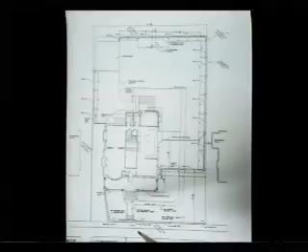The proposed retaining walls to be constructed at the back edge of the public sidewalk extend from the north property line to the main entry street, with steps where it turns at right angles. If I could see the site plan. Randy? Maybe I could show you easily. Can you just enlarge this little section here?

The retaining wall starts at the north property line, comes across to this area right here at 2 feet of height, and then at 2 foot 8 down to the steps. And then the little wing wall steps back to 2 foot 8 and comes back to the porch of the structure. These steps adjacent to the public walk, as well as to the entry walk and the wall of the side, are proposed to be constructed of dimensional pavers, up to the main house entry steps and all around to the side.

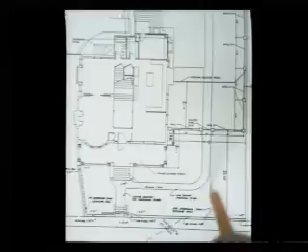We've listed the guidelines for your reference. The findings: the proposal to enclose the rear and side yards of this property with a wood privacy fence is appropriate within the guidelines. However, the manner by which this is accomplished requires careful consideration. Guideline 13.2 notes that new boundary definers should be compatible with principal structures on the property as well as surrounding historic properties. In addition, new boundary definers should not be visually dominant or intrusive, as stated in Guideline 13.3. Staff finds that the installation of any style of fencing in excess of 6 feet in height is incompatible with the residential character of the site and the historic district. Staff also finds that the extension of the 6-foot-high side yard fence up to within 8 feet of the structure's front porch is not in accordance with Guideline 12.6.

If indeed the desire is to maintain the side yard fencing at 6-foot height, the more appropriate location for returning the fence over to the structure from the east property line would be at the same location as the original wood fence, which is 60 feet back from the front property line. Any 6-foot-high fencing that comes forward of the rear southwest corner of the structure to the north of this property should have its top 24 inches be of a more open lattice design.

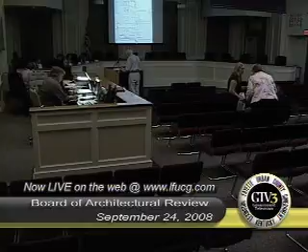Staff recommends disapproval of the request as submitted to use manufactured dimensional stone for the construction of the retaining wall, to deny the use of manufactured dimensional pavers for the construction of the walkways, and item 3, construction of an 8-foot-high wood fence along the rear property line. Staff recommends approval to construct a 6-foot-high wood fence to enclose the rear and side yards of the property, provided...

the top 24 inches of the fence when it comes forward of the rear southwest corner of the structure to the north of the property have a more open lattice-type design. Second, construct a retaining wall along the back edge of the public walk and along the north edge of the driveway curb, provided the wall is constructed of brick or concrete and no higher than 18 inches above the sidewalk or driveway. And third, construct the concrete steps and walkway in the same footprint as shown on the drawing, on the condition that final drawings or details come back to staff for review and approval prior to issuance of the COA, and if any other agency or LFUCG requires changes such as setbacks, retaining wall, or runoff water, that it comes back to staff for review.

On the next item, which is the retaining wall, we'd like to have one change. We can do an 18-inch brick retaining wall. What we'd like to have, though, is where the sidewalk, her sidewalk... Oh, okay, it's underneath. Sure, underneath.

Right here. Okay, right there, where the sidewalk intersects the street, the yard slopes up, so we'd like the opportunity to keep it 18 inches above the paving maximum all along that edge. But from here to there, we'd like the opportunity to raise it from 18 to 24, so that the grade is not below where the grade of the sidewalk is. This grade is probably higher than, actually, 24 inches above that grade. We're willing to have this slope off in that direction, but instead of having it slope in two directions with a contour line running like that, we'd like to see if we can get that.

On the last item, which is the fence, the applicant would still like to pursue an 8-foot solid fence in her rear yard along Ross Street. Primarily we'd like to pursue this because we have some photographs of other properties on that street showing there are other fences above 6 feet tall.

We may reconsider that. But that puts it in front of—it encloses all of her windows in her yard that aren't up on the porch, and it's a single individual living there. It's a privacy and security issue. So she still wants to bring it forward, to the line that's shown.

The wall A, what's designated as wall A? Right here. Yes, okay, thank you.

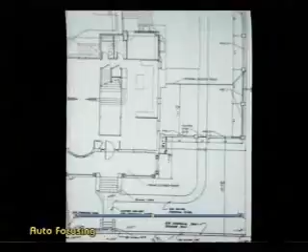8 inches? So that makes the upper sidewalk approximately 24 inches, give or take an inch, above the sidewalk on the street. So that sidewalk would be approximately 24 inches above that sidewalk, and that would be within an inch or so of where we'd like to take it. Okay, that answers my question, thank you.

I don't have any additional comments. Do we have any comments from the audience? I might have a couple further ones, but I'll ask in just a second. I want to see if there's audience comments because I want some follow-ups after that.

I would like to address the board. I have issues with my security at this property on that faces Ross Street. And I think that an 8-foot fence on Ross Street is entirely appropriate to address this issue. I am certainly willing to have 6-foot side yard fences, but I don't think going 6 feet and then an additional 2 feet of perforation is right, because I've gone with a wooden fence now rather than a masonry one, and I think that will just be an enabler for folks to come over the fence.

Security is a huge issue for me. I went to the police today and got an incident report of Ross Street and Hampton Court for the last 3 years, and there's over 500, most of which are residents or people from Ross Street.

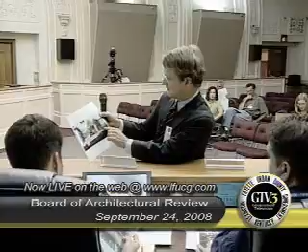How high are your first-story windows that look towards her property off the ground? The sill height? Let me look at one of the pictures. Are you asking about the windows across the front? The windows that would be potentially blocked by the fence, yes. I apologize, I didn't measure them.

Just eyeballing it, they look like, well, the fence that you can see there is the wooden fence. Our wooden fence is 6 foot, so the bottom of the windows looks like about half of that, so approximately 3 foot range for the bottom of the window. This is Mr. Winfield's got a good example that probably shows the relative relationship as far as the height. So it's probably a little over maybe 3.5 feet.

Any other question? Mr. Stephan, did you have any problem with the original proposal of the brick and stucco wall? Would it be 4 foot solid with the, I guess, the painted steel metalwork that looked like to be gridded under the original proposal? I think our concern was that it'd be preferable to do what the staff had even originally indicated.

To keep the old original wooden fence line that goes perpendicular, set back 60 feet. There were concerns about the 4-foot with the lattice depicted in purple, the C-section design, which is preferable to a solid 6-foot design, whether wood or masonry. The other thing was, as approved previously, the plat shows the wall being 5 foot 5/8 off, rather than my measurement of about 3.5 feet from our wall to where that 6-foot high solid fence would be, which I think would be a stark change from the prior approval.

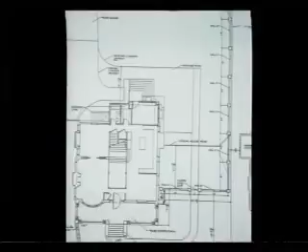In this plan, the fence encloses these windows that are on the side yard. The windows on the driveway side, she shares a driveway with the next door neighbor. It's wide, it's a paved space. They're both lit, and the neighbor's looking in there too, so it's a little bit more secure. On this side, it's yard, there's bushes and plants, and a single individual living in the house would like to place the windows along that edge behind the privacy or security fence.

I see. Are you all still open to possible slight design changes to accommodate everybody concerned? We're going to wait for your determination. Okay, well thank you very much. Thank you.

Any additional comments? Staff? The only item I'm not clear on is if at the steps, how that change in grade will happen—if it will each step increase by 8 inches in height, or how we understand we get there.

Mr. Ginocchio's question: would it be a stepped elevation change in the retaining wall along the steps, or would it be 24 inches from the front to the back of the stairs? I would propose that we do it right behind the retaining wall. In other words, the retaining wall line is continuous, congruous, and then right behind that we would step it up. So if the wall's 12 inches thick, we would go straight up 20 to 24 inches and return it just into the grade with a cap brick on top as well.

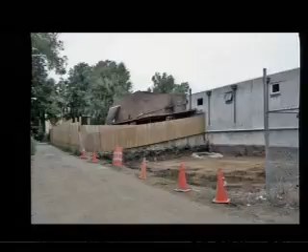And this is the building in question that went down last year. This was 2 duplexes, and the proposal now is to construct a single-family home on this lot. To give you some viewpoints of the alley and the street, this is across the street that was approved by this board last year, and this is the site in question now, presently, in its present condition.

At this time, the applicant is asking to construct a single-family house with a planter in front, an attached garage, patio fence, and resistance pool in the rear. The 3-story structure has dimensions of 47 by 30, and will have a plank form site concrete foundation. Could we see the plans, Randy? The front elevation, please.

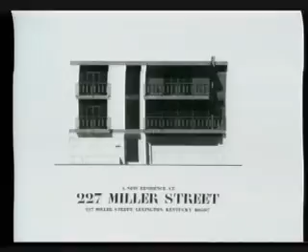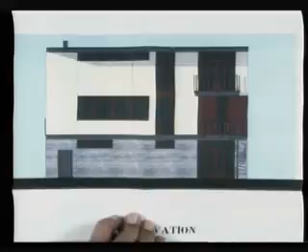We're having a form plank site concrete foundation, and the upper 2 floors will consist of wood frame stucco walls with mahogany siding accents on the east and west walls. Do you have the color copies? We're going to switch and use a color set. This is actually the rear elevation. This will be a form concrete foundation with stucco walls, and these will be vertical mahogany panels with metal railing systems and windows trimmed out in wood.

We see the front elevation.

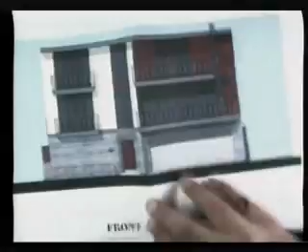Here's the front elevation. The attached garage, the recessed entrance. This wall moves back, and we have a flat roof with an overhang and balconies and a front planter.

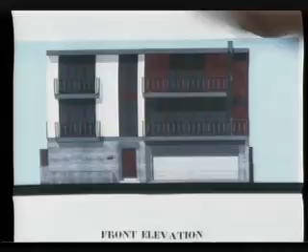This is the property line on this side, and this is the property line on this side. It's a very narrow lot and a very tight house. The rear yard will consist of a patio and a resistance pool.

If we can see a section that will include that, the proposal calls for a mahogany fence on a painted steel frame over a 48-inch reinforced concrete wall that surrounds the pool and the rear patio area.

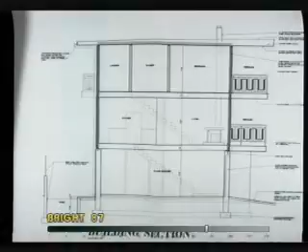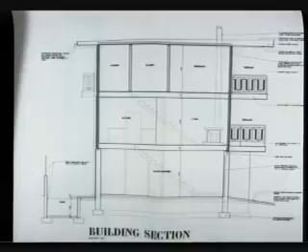We can see maybe a floor plan of the whole site, maybe. That's it.

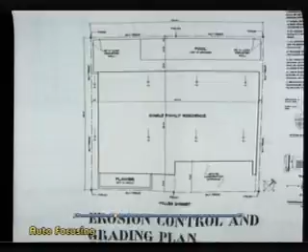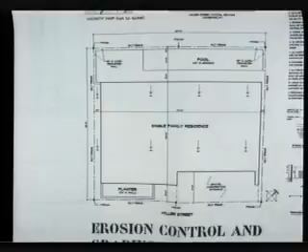Guidelines are included for your reference. Historically, this lot was home to two duplex structures, and the proposal to construct one single-family home on this empty lot is within the guidelines and appropriate for the structure. However, it requires further discussion.

Given the lot size of 50 by 45 and the land use zoning requirements, placement of the structure on this narrow street is within the guidelines. The existing house has had front porches and was situated close to the street. The new building being constructed across the street is close to the street. The structures down the street have a similar close orientation to the street.

Guidelines 35-5 state a new building should be placed on its site in compatible relationship to the setbacks and placement of the adjacent surrounding buildings.

As proposed, the contemporary design front and rear elevation undulates with the balconies and overhangs, fenestration, and the indentation of the building form at the northeast corner, creating a visual push and pull that helps soften the height, mass, and scale of the structure. Guidelines 35-1 and 35-7 state contemporary design compatible with adjacent surrounding structures is strongly recommended.

New construction which creates an imitation historic sense of history shall be avoided, and the proportion, directional emphasis, and rhythm of new buildings should reflect the predominant proportion, emphasis, and rhythm of adjacent surrounding buildings.

In addition, the flat roof having a larger overhang on the front porch provides a porch-like effect and visually creates a more compatible appearance to the adjacent new building roof line. Guidelines 38-1 states the roofs of the new building should relate in shape, pitch, and materials to the roofs of the adjacent surrounding buildings.